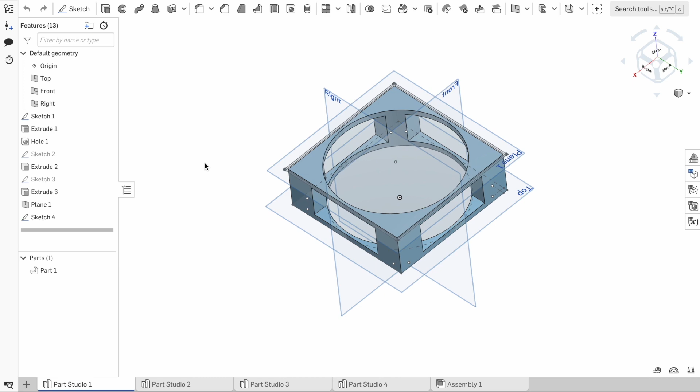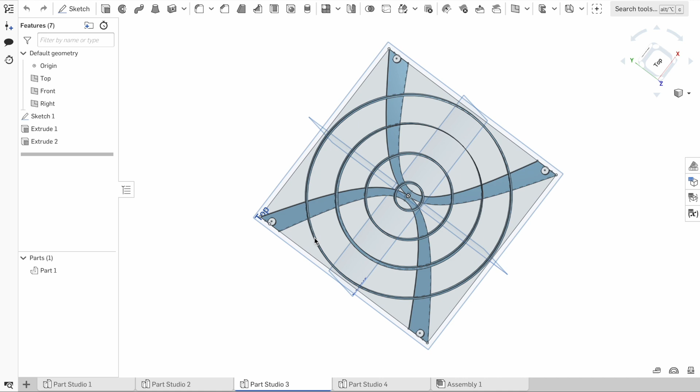This is the base. I have 4 windows and 6 holes to attach my fan above it. And then I have another base under it so that I can remove it, and also if some flies or something are dead, I can remove them easily. I have a fan cover which I made a little bit bigger for my design, so this looks a little bit different. And I have a mesh.

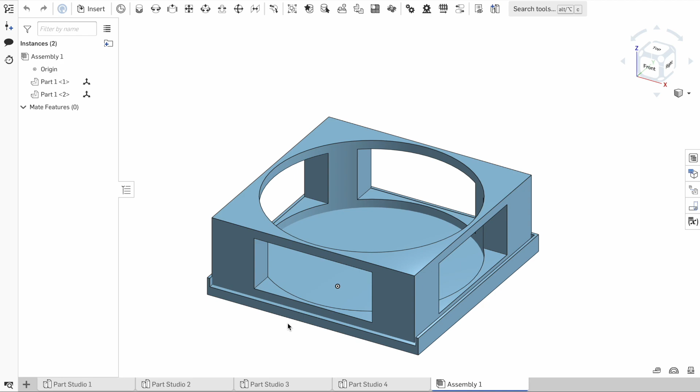This is important. In order to make the design better, you need to have a mesh so that the flies can't fly outside, and you can also keep the air moving inside the part. And this is the assembly of it.

And now the electrical design. As you can see, I have a battery, a switch, 6 LEDs, 3 in series and also 2 in parallel, and also I have a fan. I use UV LEDs which have 3 to 3.2 volts and 20 milliamps. So because I have a 9-volt battery, I am not using a resistor because 3 LEDs means around 9 volts, and it will also protect my circuit and I don't need a resistor for it.

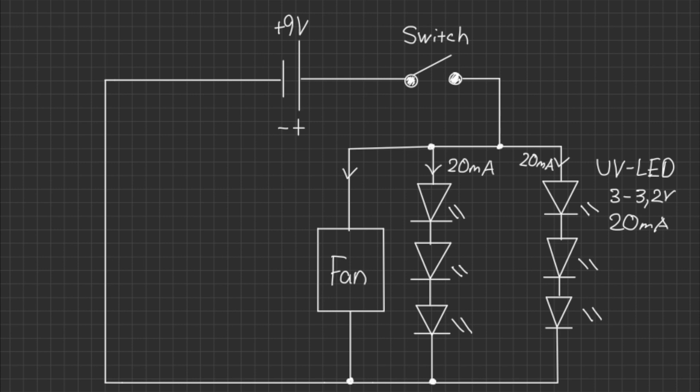And then finally my end product. As you can see, when I turn on my switch, the fan starts to turn. I have also UV LEDs on and you can see that too.

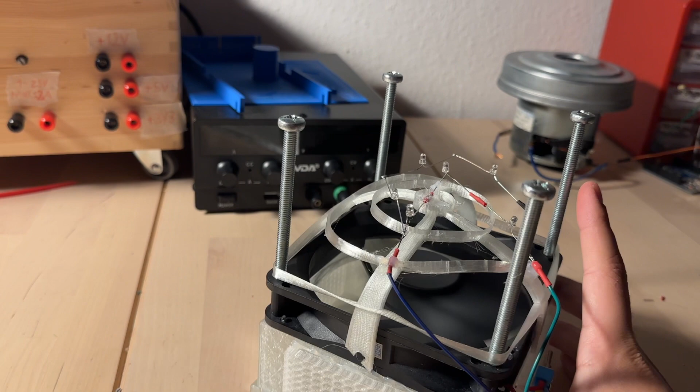At night and in a dark environment, the flies will come near these LEDs and the fan will suck them into this. The mesh will ensure that they won't fly outside, and by easily turning off the switch you can turn everything off. The battery is hidden inside. You can see through the blades that I have my 9-volt battery to make everything a little bit more compact. And here is my base.